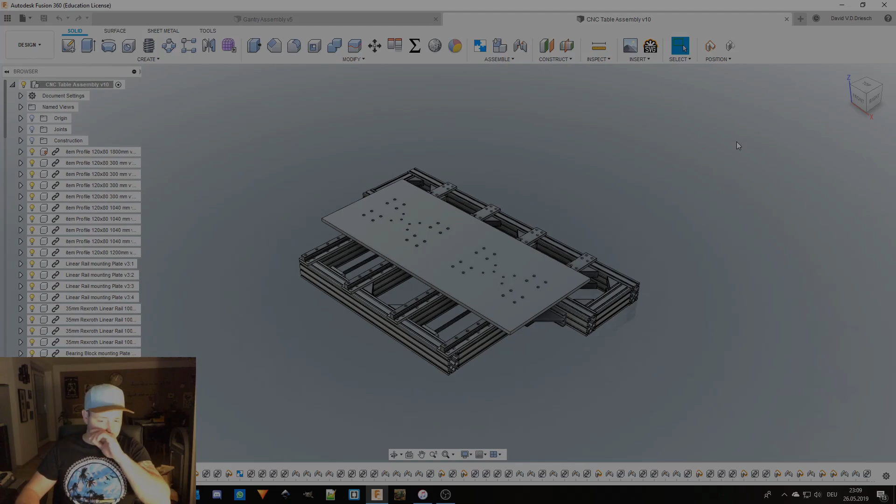Welcome to part 3 of my video series on how to design a CNC router, at least the way I would do it.

In the last part I designed the table structure and made it all up. Now I'm going to design the gantry, or actually I already did design it. In this video I'll show you how I switch back and forth between the different assemblies to achieve how I draw those aluminum plates by just taking measurements, so I don't have to draw it in the assembly. I hope you can follow me with that.

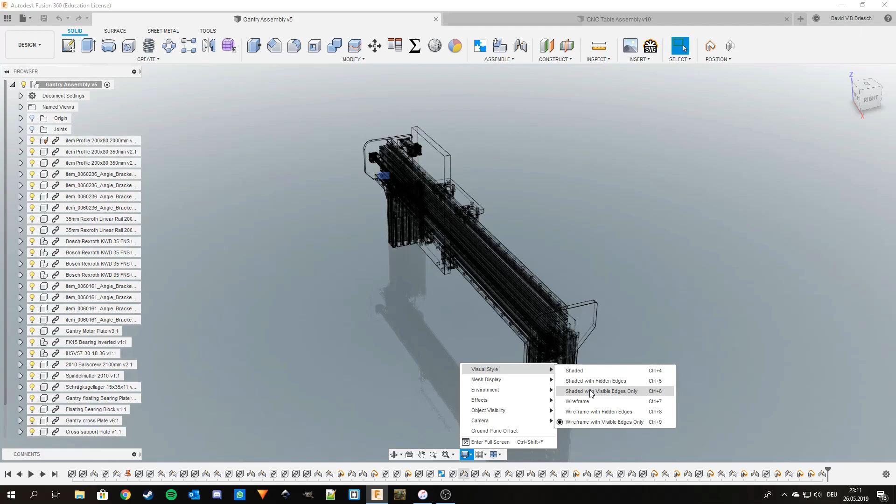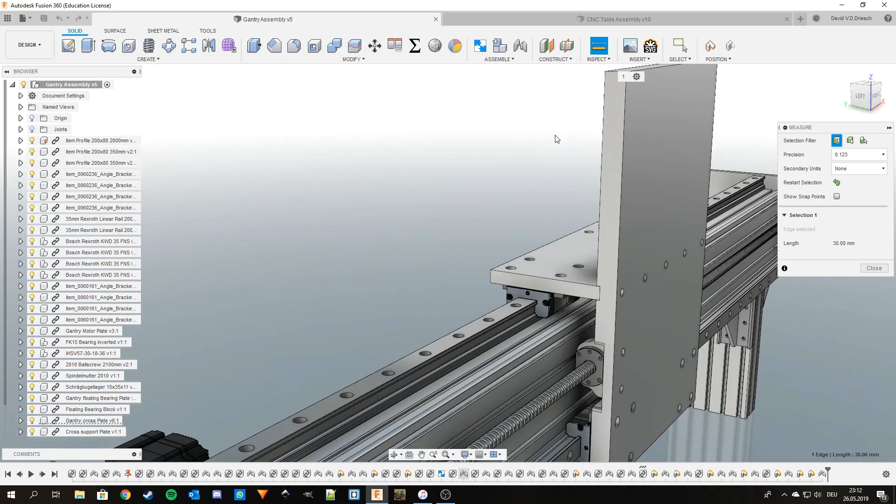I actually already came up with this design. It's again ball screw drive, this is what's going on here. This one is a 30mm aluminum plate, yeah, 30mm, and also those are the 35mm linear guides.

So what I'm now going to design is the side plate that will go on those sides. Let me hide this one for now. Basically it will extend down to here, go up to here, make a corner, go up to this profile, and back down here. This is going to screw or bolt onto those profiles.

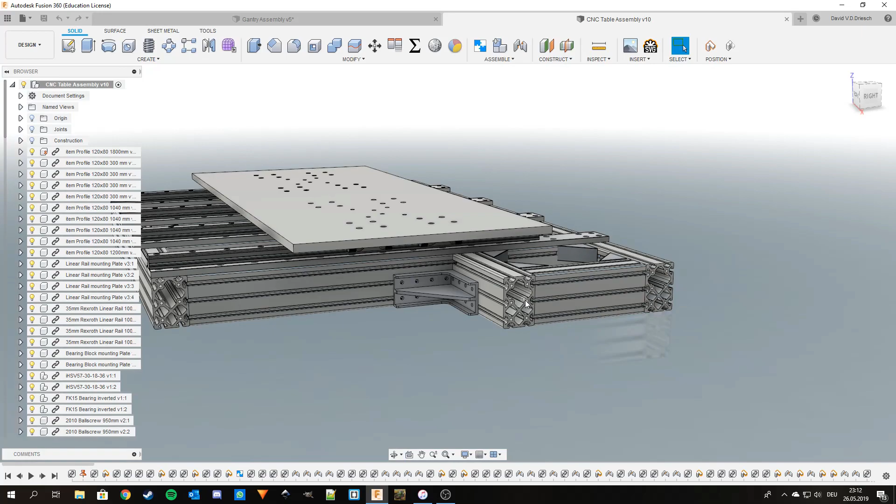This video is going to be a bit longer than my last one, so I hope it won't get too boring for you. But yeah, let's start designing.

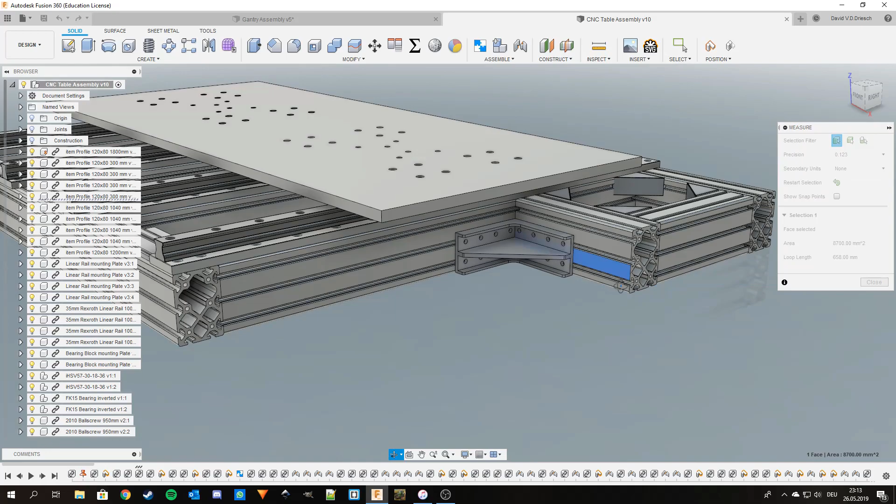First I'm going to take measurement from there to there: 460mm.

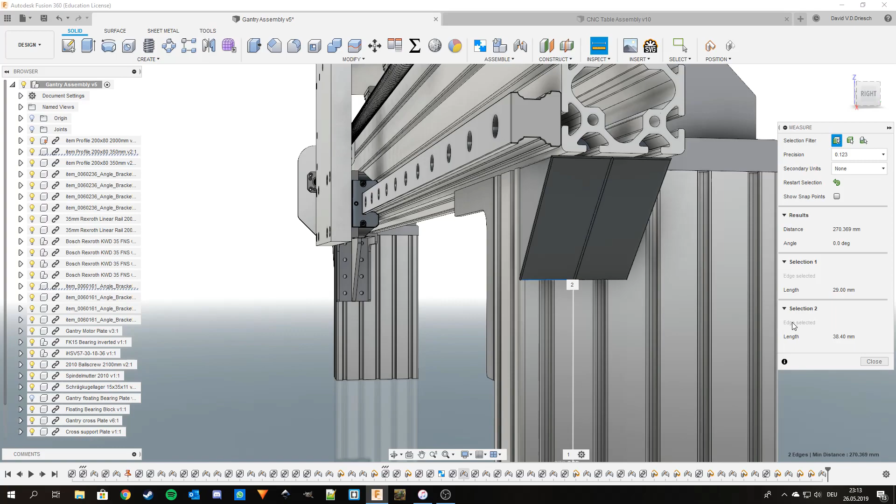This is this edge to... I'm going to make it 280mm, so I have a bit of room. Profiles are 80mm wide, this one's 200mm in height.

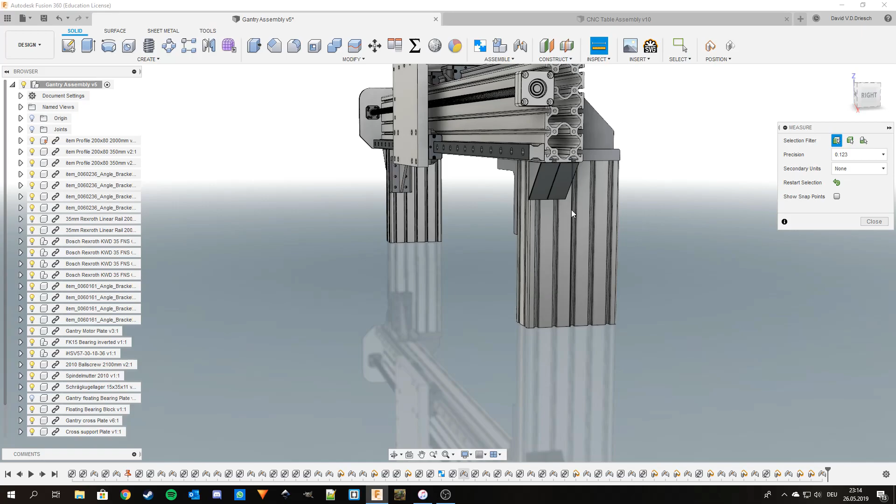Wait, overall height from there. It's a bit complicated, but as I mentioned in the last videos, I want to keep the assemblies pretty clean. 550 plus 120 is 670mm overall height.

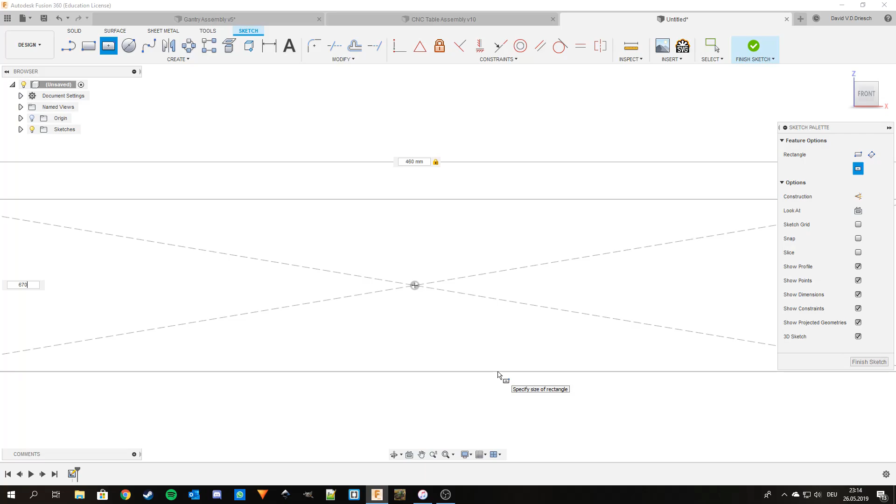Okay, starting out with a new sketch. 460, and what did I say? 670. Extrude 20 millimeter.

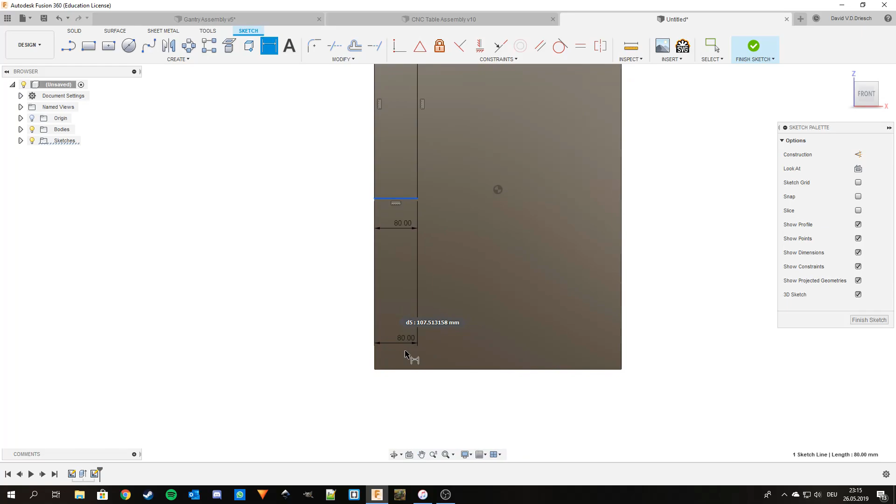I always want to make those parts look as aesthetic as possible, because I don't want it to look blocky. It should have some nice edges on it and look quite nice. Just going for a nice design.

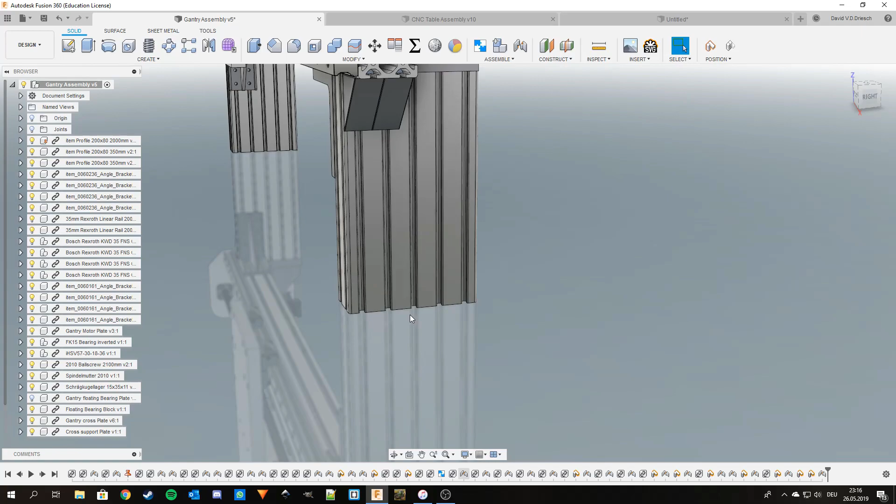Now I'm going to make those holes. 20. No.

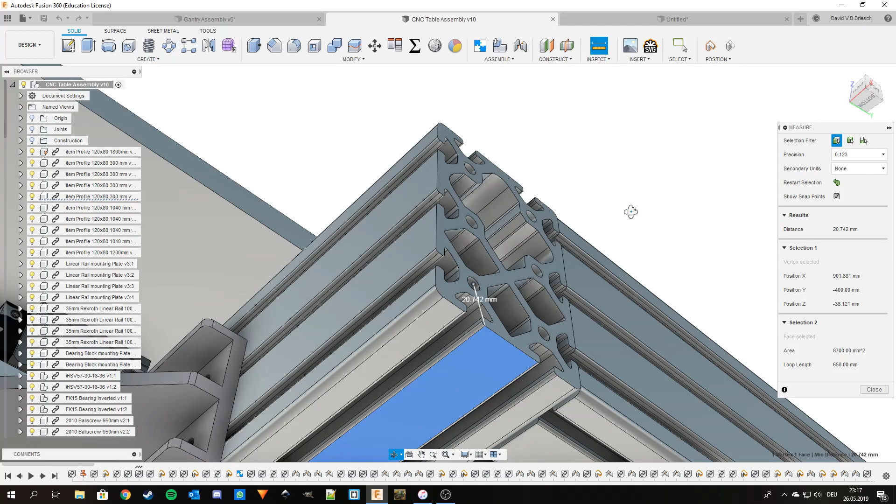So now you can see how my workflow is. It's actually pretty inconvenient, but this is how I do it, and this is how I feel comfortable designing things. Sure enough, there are different ways to design things like this, but this is my way.

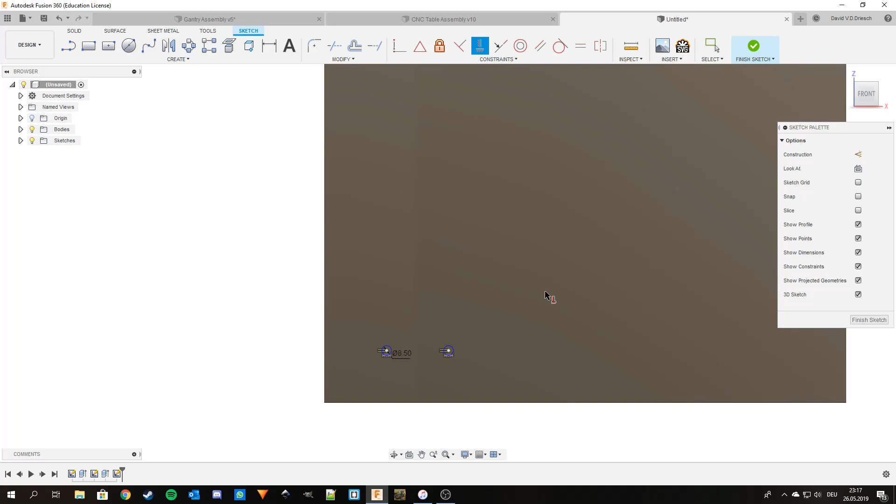This is going to be horizontal to this one. Dimension 20 millimeter, 40 millimeter, 20 to there.

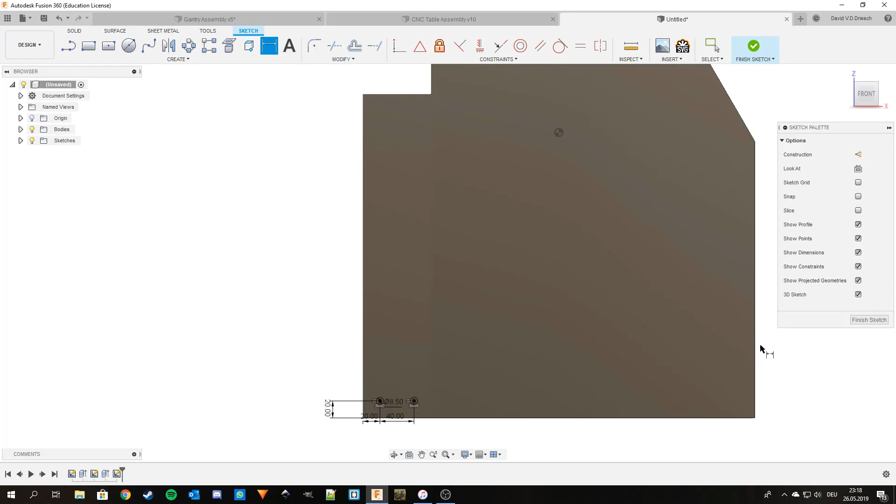Okay, finish, extrude. That's 20. Another sketch on there. Making countersink holes.

Just eyeballing it. Later on I always can tweak this. For now, just for the basic idea.

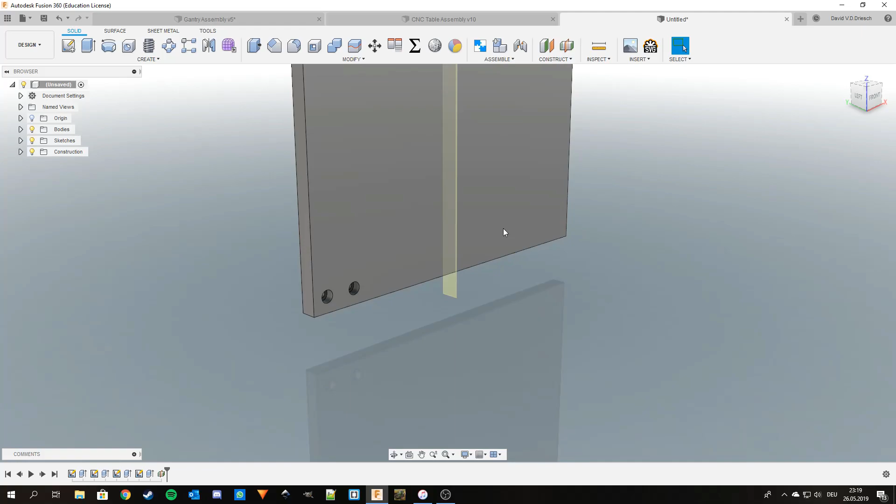Now I'm going to make a midplane between this and this face, because I'm going to mirror those features to there. But first, I'm going to make a rectangular pattern of those features.

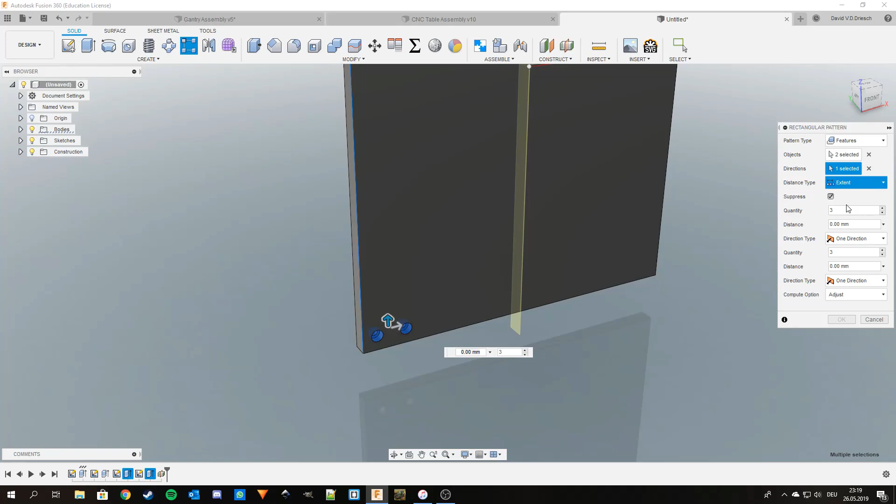Just simply select this extrude and this extrude in the timeline. The direction will be this one, and I'm going for spacing. Spacing is 40 millimeters, on those profiles.

Three holes, and now I'm going to mirror features: this feature, the rectangular pattern, and this extrude and this extrude, with the mirror plane being this construction plane.

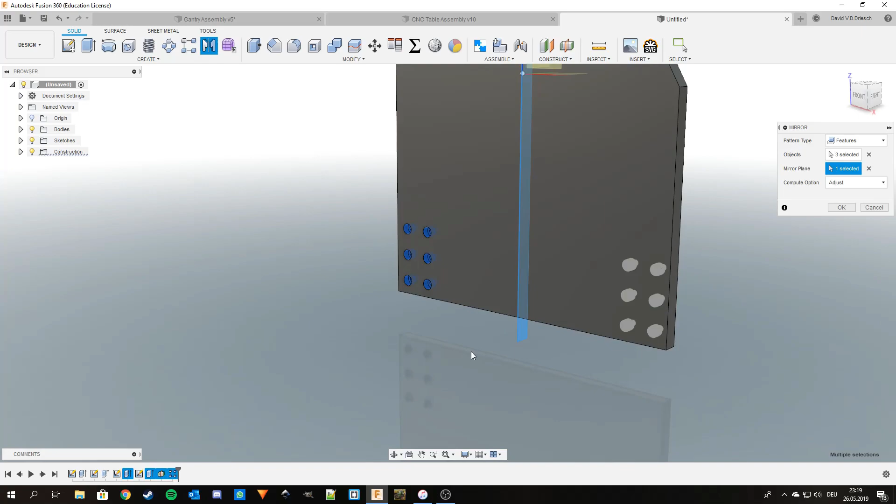And those holes are those ones here. This is where the bolts will go into.

Now I'm going to make, for those 3 slots, I think only 2 holes. So I could actually do it with a rectangular pattern, selecting faces.

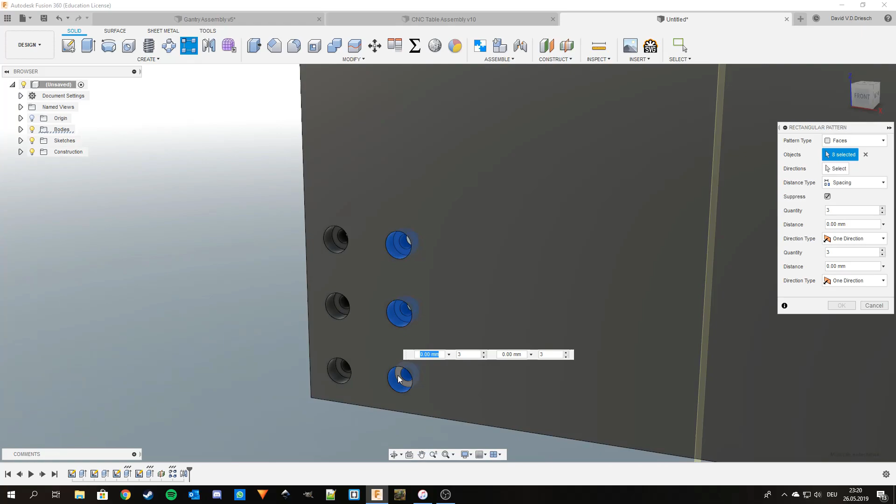This, this, this, this, this, this. I don't know if this works out. Never made a rectangular pattern with those faces, but I only want 2.

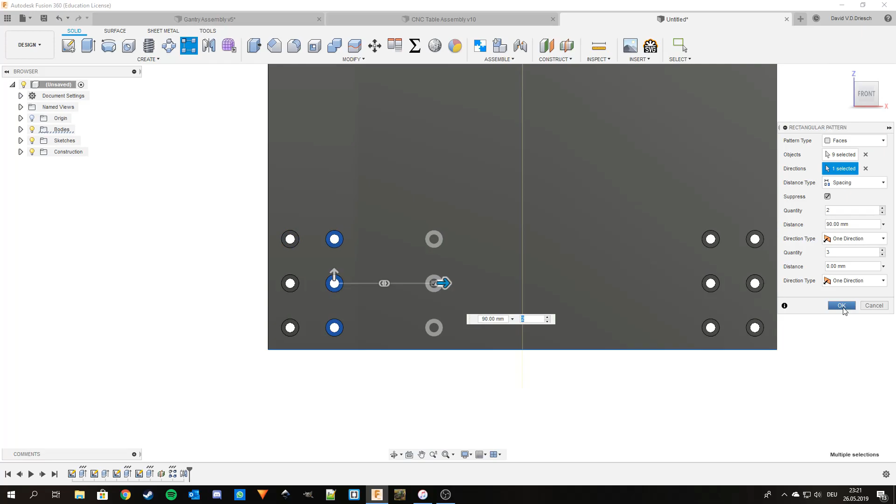And make them about 90mm apart. Okay, oh yeah, it worked. Great.

Let's do another one: this, this, this, this, this, this, this, this, and this. Direction will be this one, and 2, then 90mm. Okay, cool, great.

Now I'm going to make the holes for the uprights on this profile.

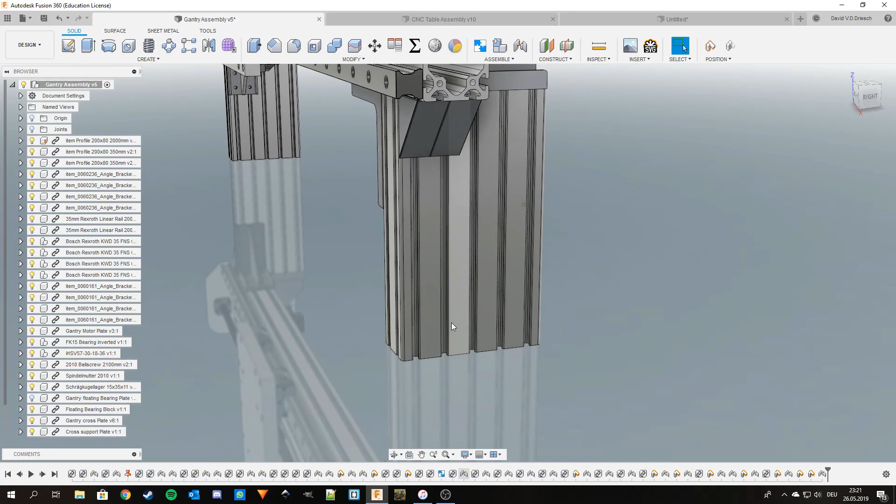First slot is 20mm away from this face, and then each slot is again 20mm, if I remember right. But let me check, this point to this point. No, 40mm, sorry.

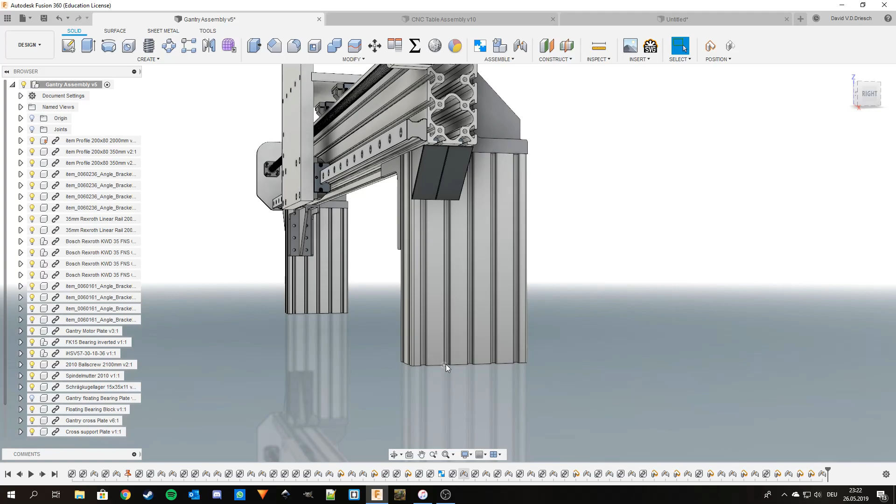I'm going to make the first slot, the middle slot, and the last slot. This should be plenty to hold on to.

Sketch, circle, just place them randomly. Dimension 8.5mm through hole. This one is equal to this one is equal to this one, and they all should be horizontal to each other.

I'm going to dimension distances: 20mm from the face, then 80mm to the middle slot, and again 80mm to the last slot. That's right? Yeah, it is.

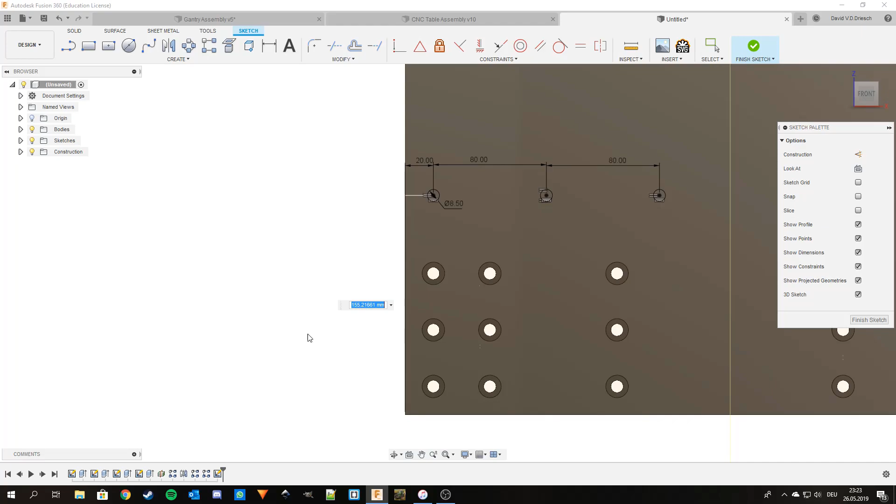For this dimension I'm just going to eyeball it, let's say 150mm. Extrude. Select the profiles, minus 20mm.

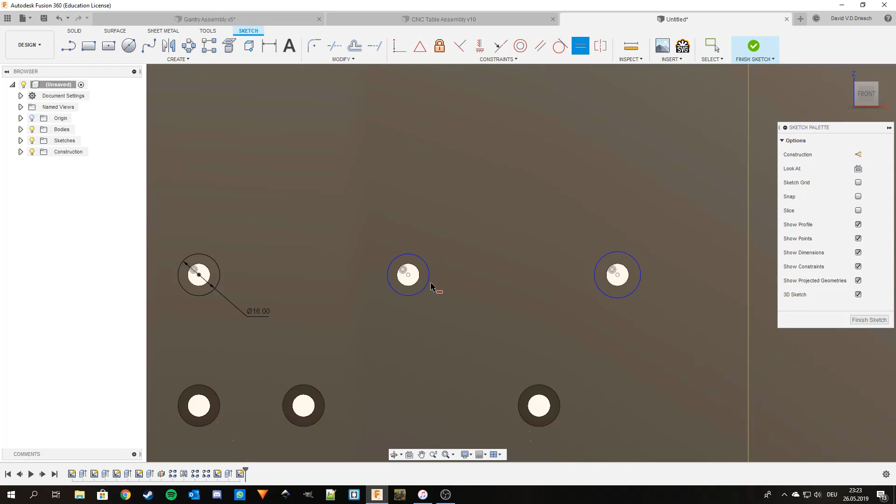Press C for circle. Click the plane or face you want to sketch onto. Draw those 3 circles. Dimension it 16mm. Again, equal constraint. There you have it.

Extrude 3 profiles, minus 10mm countersink. There you go. And again, rectangular pattern.

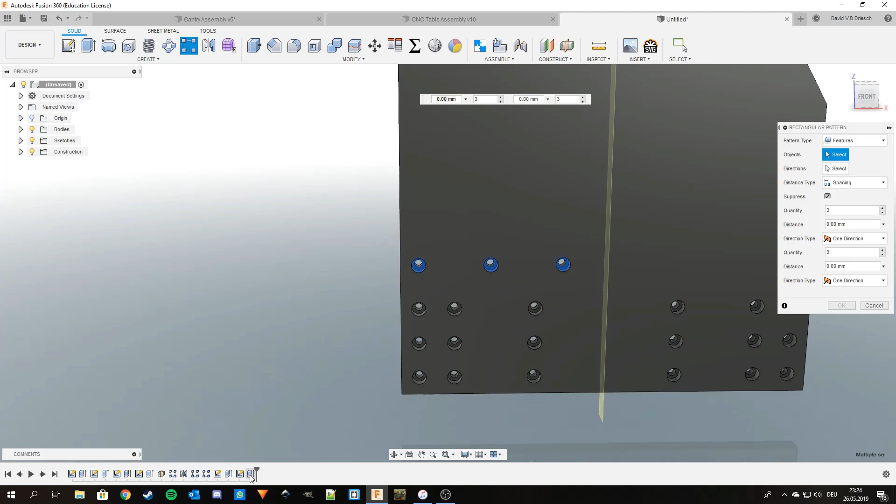This time I'm going for the feature. Just select this feature and this feature. The direction is going to be upwards, and I'm going for 3, that should be enough I think.

Oh, I can't. No, that's right.

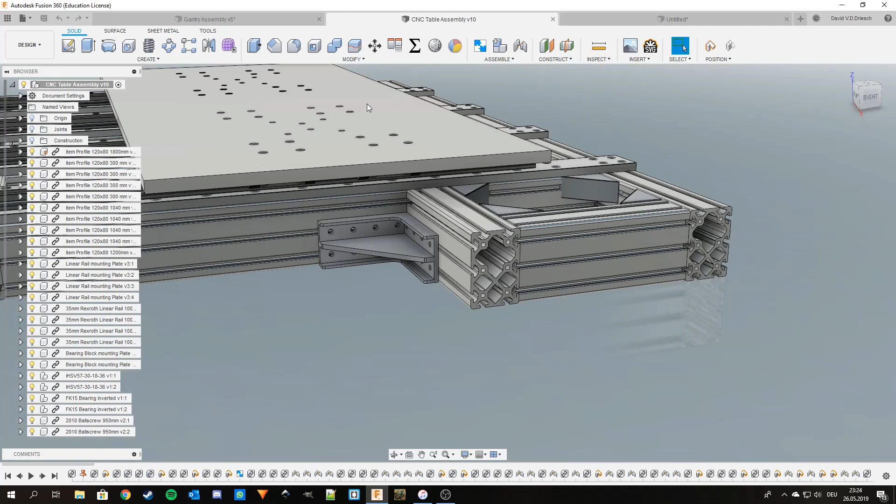Yeah, a lot of holes, a lot of bolts that will go into there, but it has to. Just turn off this construction plane. This basically should be it. Now let me see if I missed something. Actually, I don't think so. All looks good.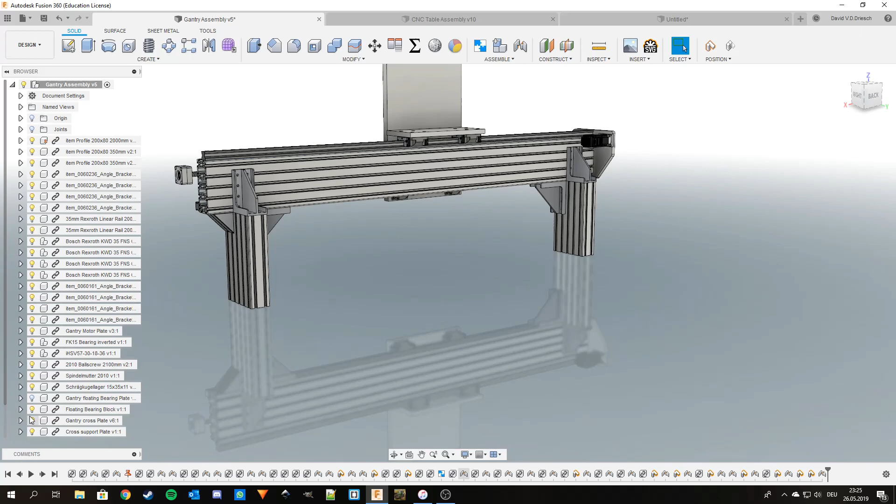Oh yeah. But no, I actually don't need this. Just don't mind, I'm just thinking loud. Put this one on.

How much space do I have right here? That's there. 24 millimeters.

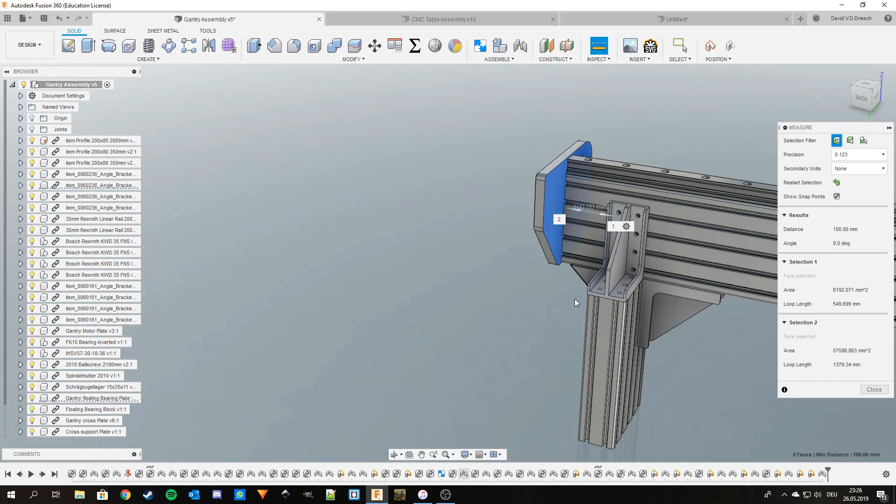Just thinking if I put a plate, because the gantry riser goes all the way up to here, and I'm thinking if I put a plate from there to there. This is 100 millimeters, plate would be 80 millimeters, but I don't think that it adds a lot of strength to it.

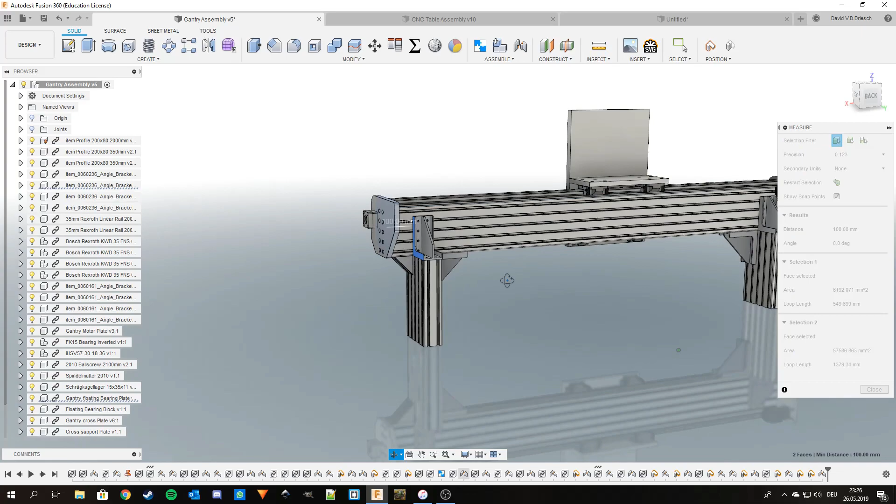Because I already have here my angles and this one angle. So I think I'm going to decide it on a later point.

So as you can see here, the other plate or gantry riser that I will make has to be a bit different, because my servo motor is actually penetrating the plate, which will go onto this side. But I will show you how I get around this one.

Now I'm basically wrapping this one up, making a fillet right there. It's I think 3 millimeter. I make it 3.5 because my cutter is going to be a 6 millimeter cutter, so I have a bit of clearance.

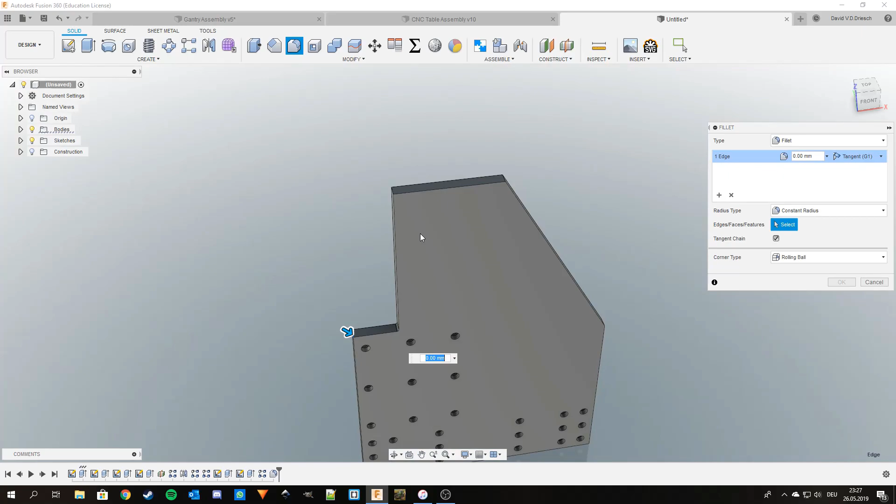Yeah, then just rounding parts off, so I don't have any sharp edges. There. Oh. Like this. 100 mil. And okay, then I'm going to chamfer edges. There.

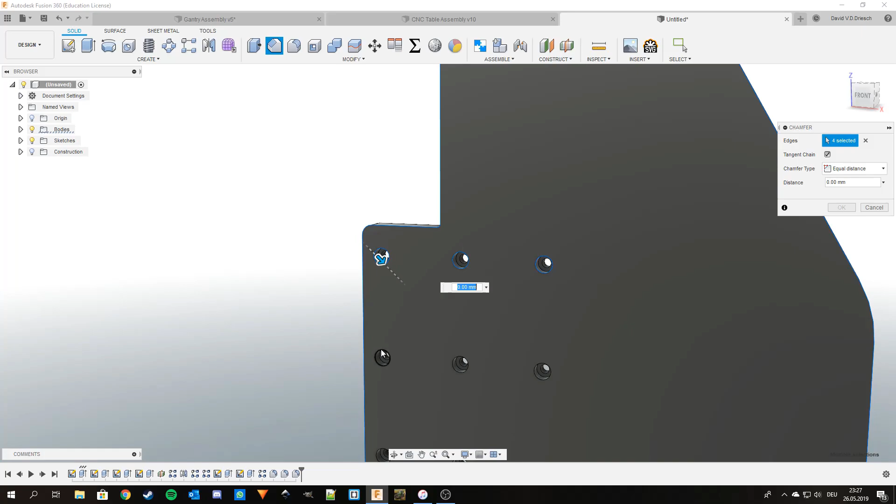A lot of clicking, but this is how it goes.

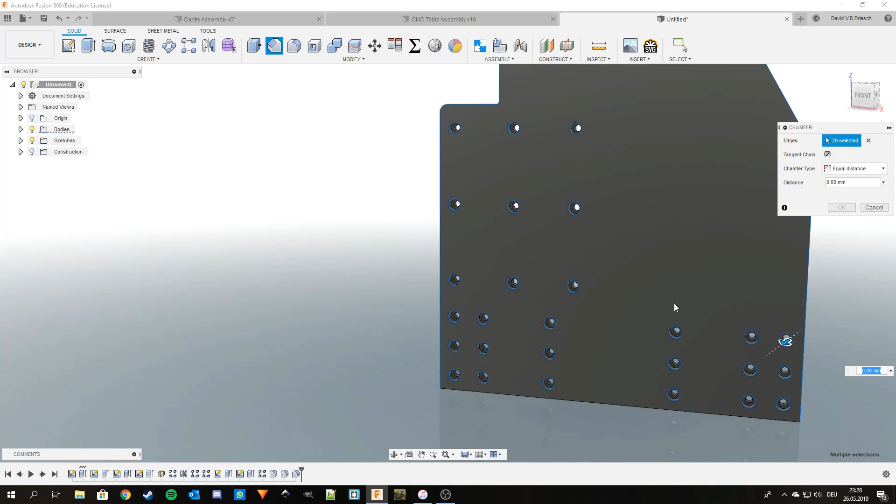I hope you guys really aren't bored with my videos, because sometimes it actually is pretty boring to watch somebody design things like this. But yeah, this is how it goes. And if I can teach you a couple of things, it's great for me, because I always want to help somebody out. If you have a question, just let me know, and I try my best to answer it or to help you out.

Next thing, just making it look good, aluminum satin.

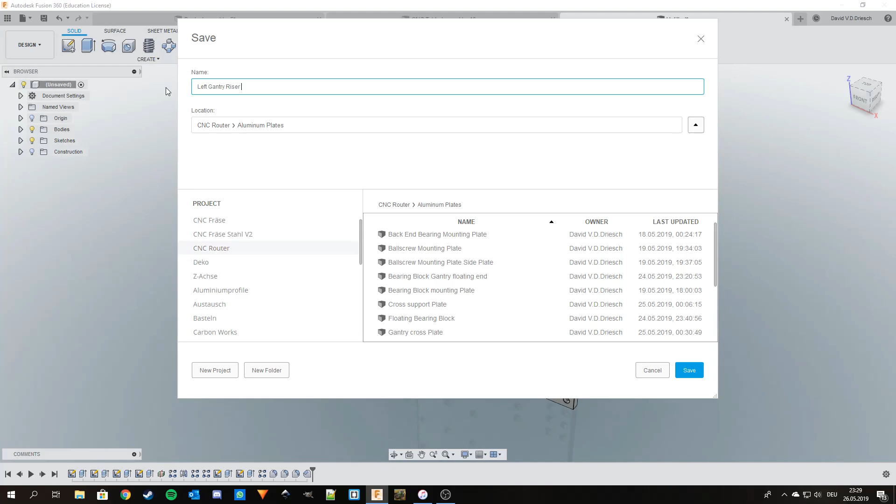Yeah, this is where I'm going to save it, because in the right location. Where is it? CNC Router there, aluminum plates, and this is the left gantry riser plate, and save.

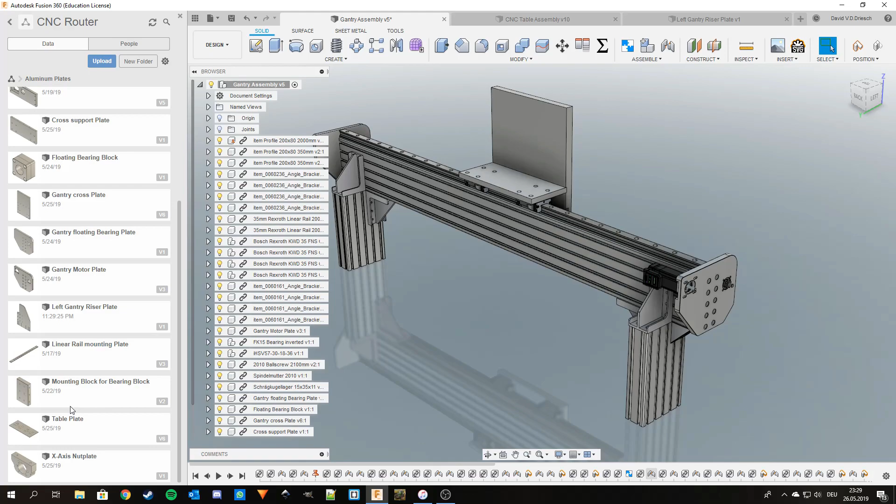So let's go have a look if it fits. Aluminum plates. So here you can see I actually modeled all those plates up and saved them in here, so I have them all on file. This one is it. Insert into current design.

Turn it around. Bringing it into rough position. Yeah, let me see, how am I going to apply it?

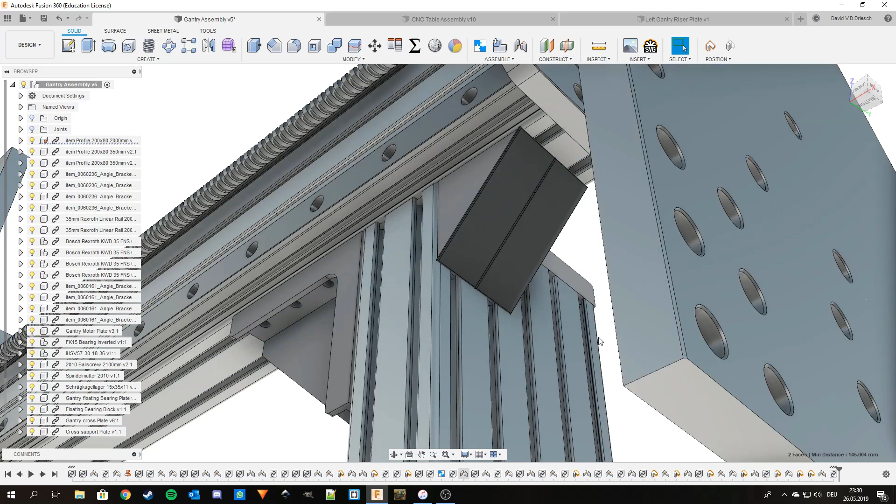Actually, I'm only going to align it there to there. Repeat, there to there. Repeat, there to there.

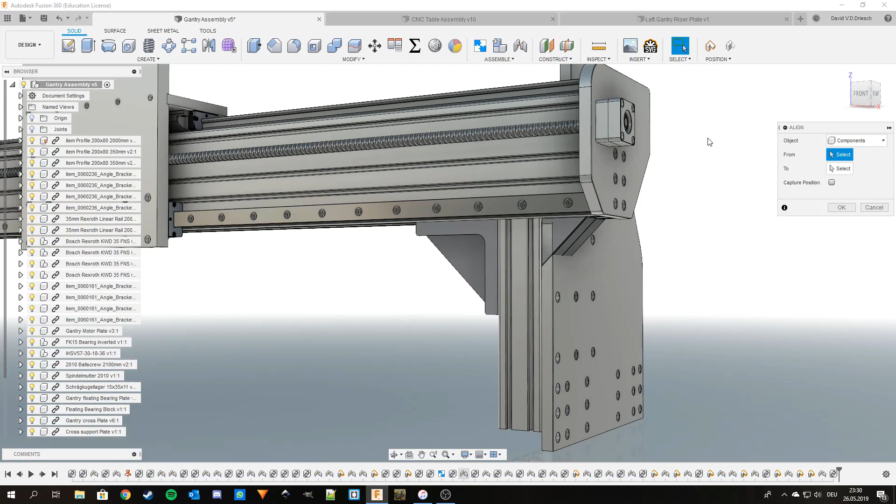Oh, and you can see I made a mistake. I made a huge mistake. No, I didn't. I haven't aligned it properly. There you go. All nice and snug.

So I think that I'm going to make an angle right here. So this means I have to make another hole into here. But I'm going to do this later on.

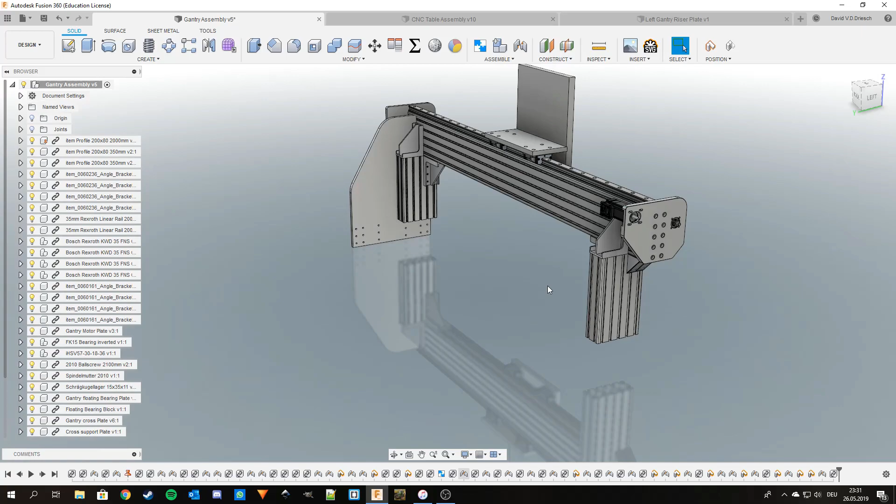For now, I'm going to make the other side of this gantry riser plate. Yeah, I'll show you how I do this. And it's actually as simple as mirroring this one over.

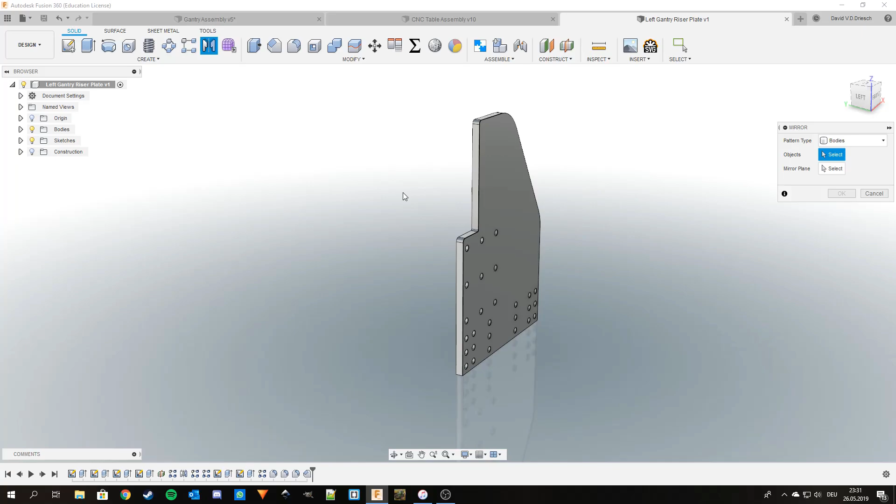So I'm going to create a mirror, not a feature. I'm mirroring the body, and the mirror plane is going to be this face, the back face of the plate actually. Then I'm going to remove this one.

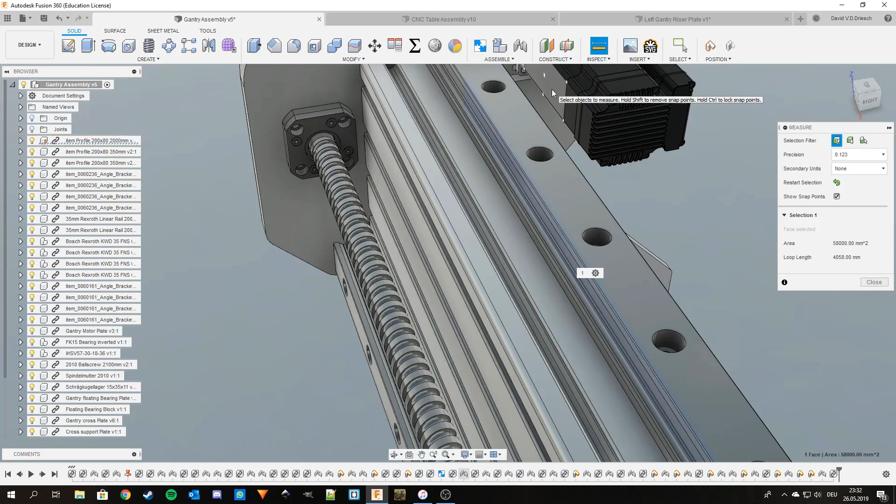And now I have to figure out where the cutout has to be for my servo motor. Gantry assembly, and again now I have to measure backside of the profile to this side of the motor, and as you can see here I have a bit of adjusting room.

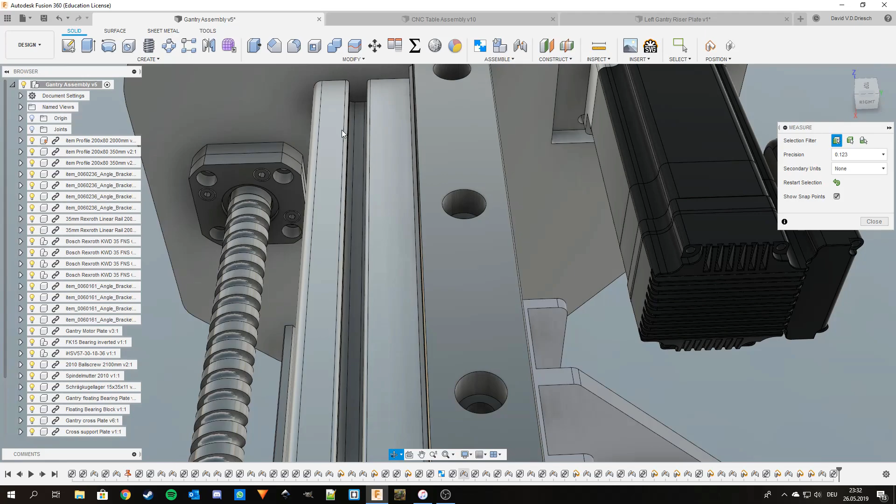Actually, I'm going to measure from there to there. Okay, that's 30 millimeters. And now I have to measure from the top of the profile to the bottom of my servo motor, and this is 38.5 millimeter. I'm going to make it 40 millimeter so I have a bit of clearance. So 30 millimeter from the back and 40 millimeter from the top.

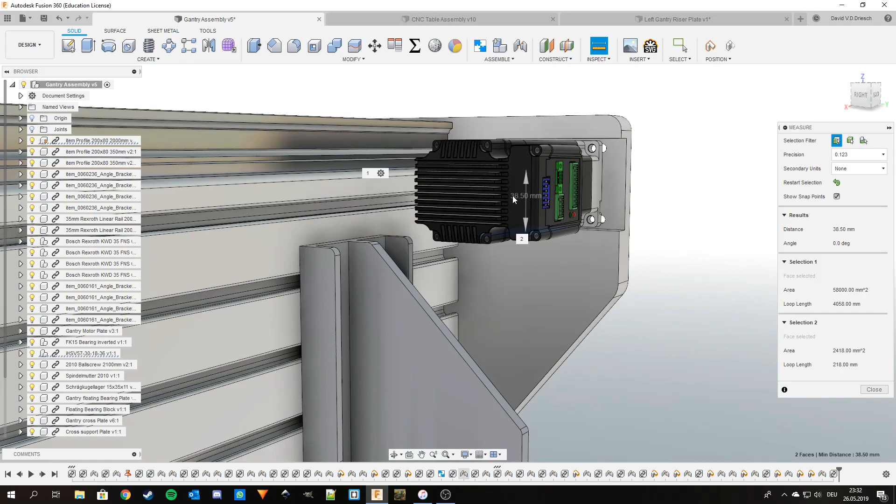This means for this one, sketch on here, I'm going to project the outline, so I have the correct measurements. Hit OK. Line, another line, just sketching it roughly in. Dimension, this one, oh wait,

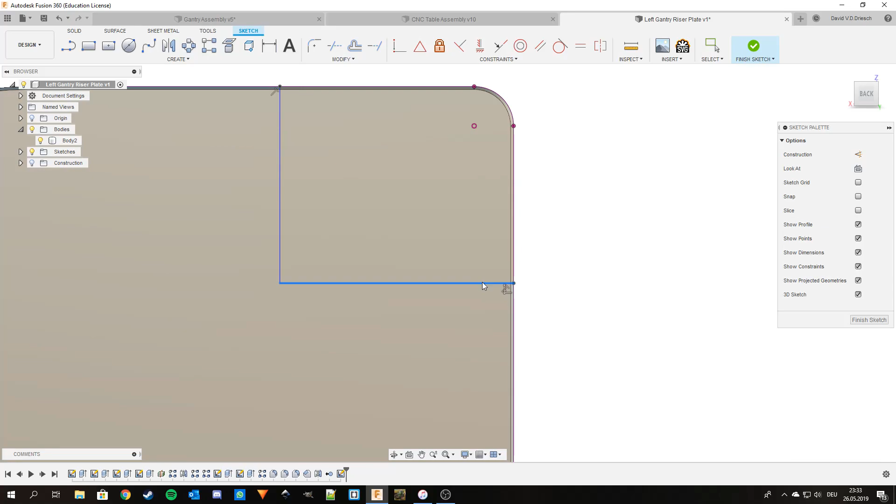it's completely wrong what I'm doing. Dimension, this one has to be 30 millimeter from there, right?

Yeah, and then I actually can cut out this whole section. Alright, this one has to be 40 millimeter. Now another line.

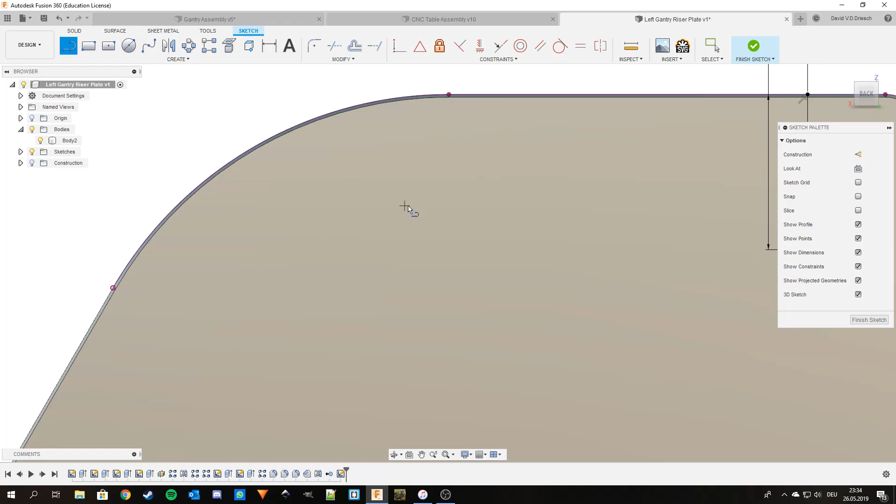First I have to project this line. Okay, line there to there. Making this one horizontal, turns black so it's fully defined. Hit extrude. Minus 20.

Oh, I see. Edit. Forgot the chamfer faces. There you go.

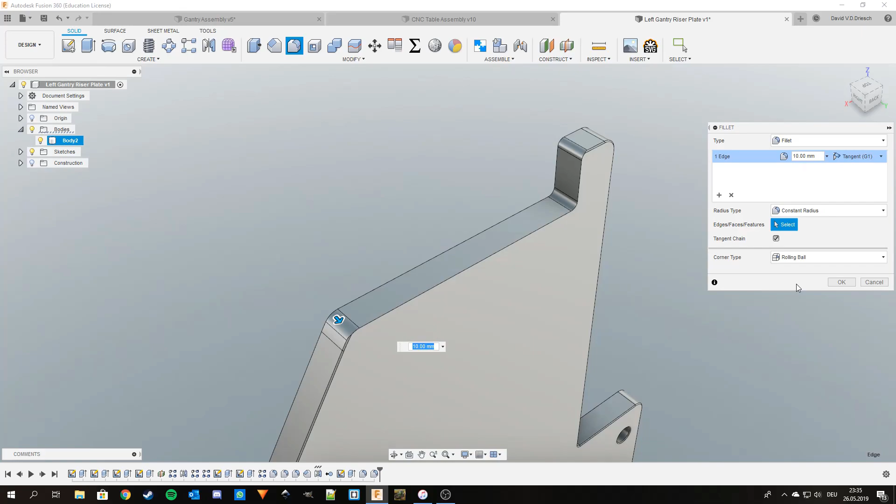Then I'm going to make a fillet right here. Yeah, 10 mil is fine. Actually, over there too. And right here. Also a small fillet. Now I'm going to chamfer.

Let's see if this works. I hope so. 0.75. Yeah, nice.

So now I'm going to save this one as right gantry riser. Actually, I named them the wrong way. Oh, but I can deal with that.

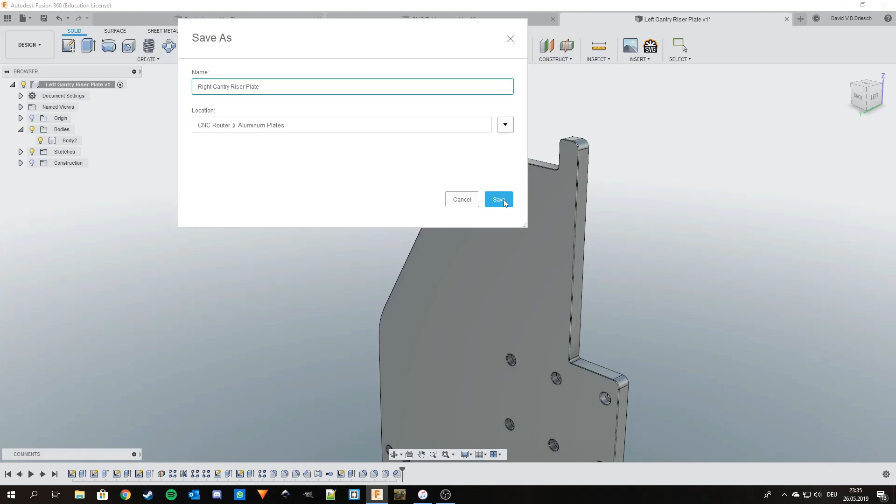Now let us look. Well, let's have a look if this fits all well. I hope so. Just has to save.

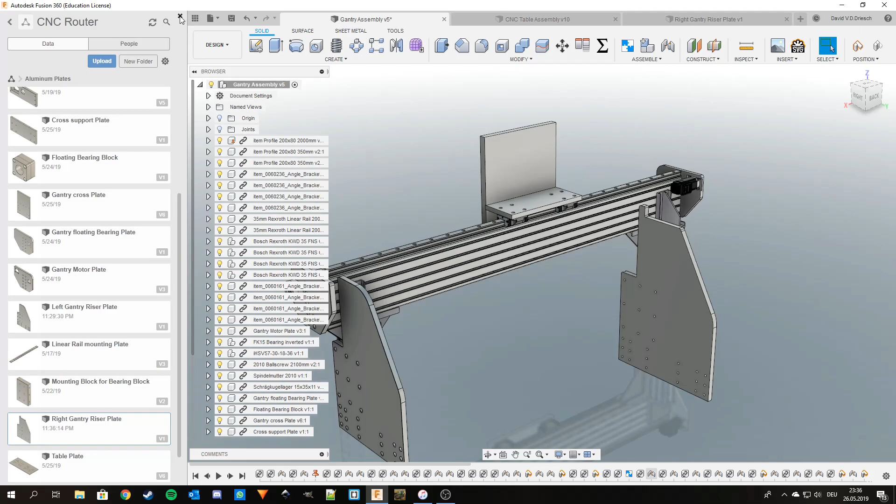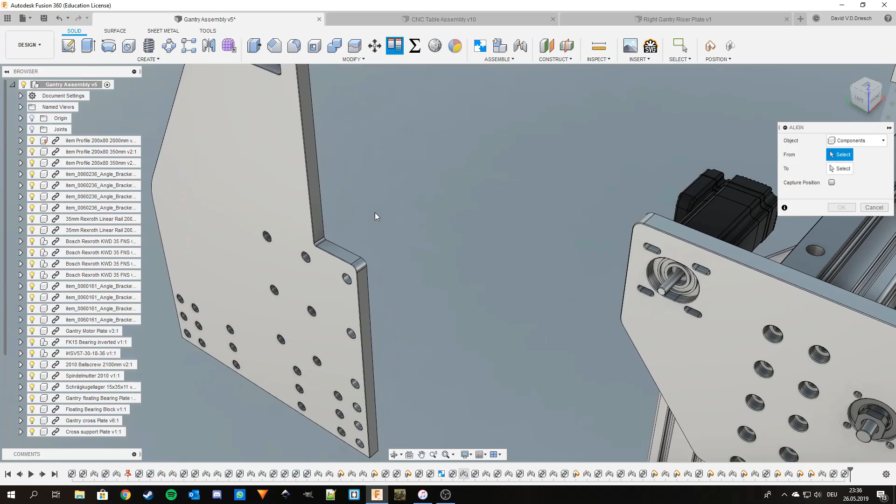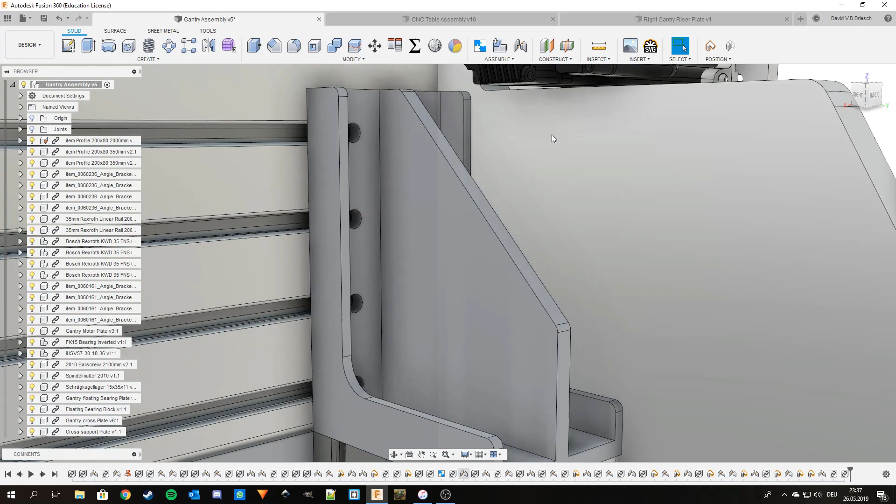Insert. Now aligning it there to there. Top face to the top face of the profile. There, there, to there. So as you can see, fits nicely. Bit of clearance, just enough, should work out.

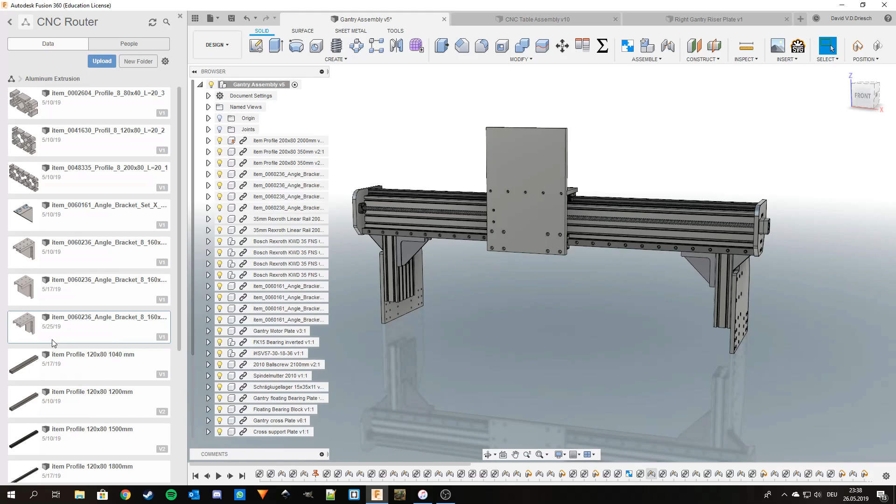So yeah, this is the actual process of how I make those plates in different files. Now the last thing I'm going to add right here is the angle on the bottom side of those profiles. They are located here. I actually made a modified version, or 2 modified versions, of those angles. Normally they come with those straight edges, and I have to use for the bottom one a modified one because otherwise I won't have the clearance for the table. But you will see this in a sec. Just let me assemble this.

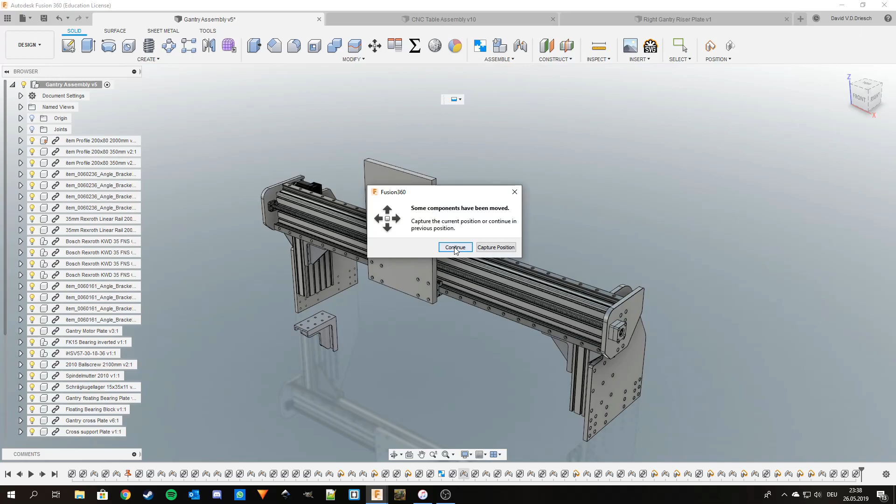If you don't have reference points like holes or something else for things to assemble to, you can just use points on parts. This is what I'm going to do right now. I'm using this point. Wait, do I have it the right way? No, I haven't. I have to choose this point, and then I'm going to choose this point. Now I'm going to turn it 90 degrees, and there you have it. It's assembled just fine.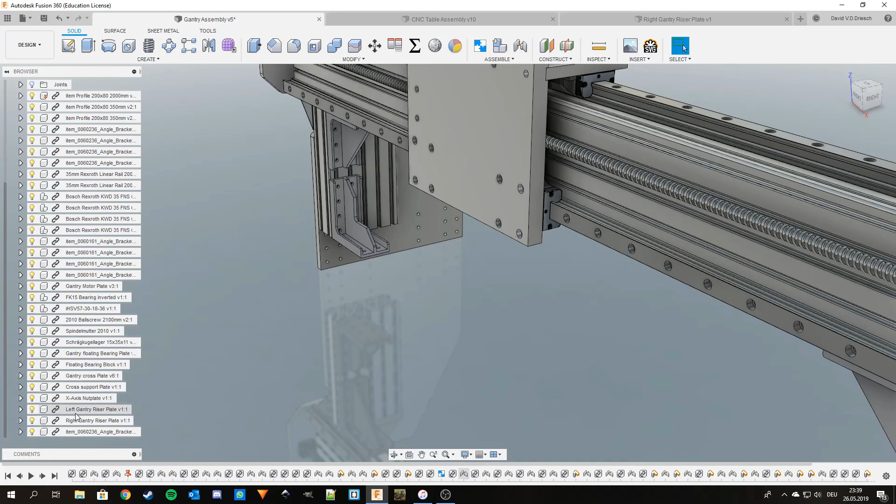Then I'm going to copy and paste this angle bracket, turn it around, and repeat the same thing. Choose this point, and then choosing this point. And if you want to lock the mouse pointer onto certain points, and don't want to have it fly all over the place - if there are many points, just hold down Control and it will jump to the next point, or to the point that's next to the mouse pointer.

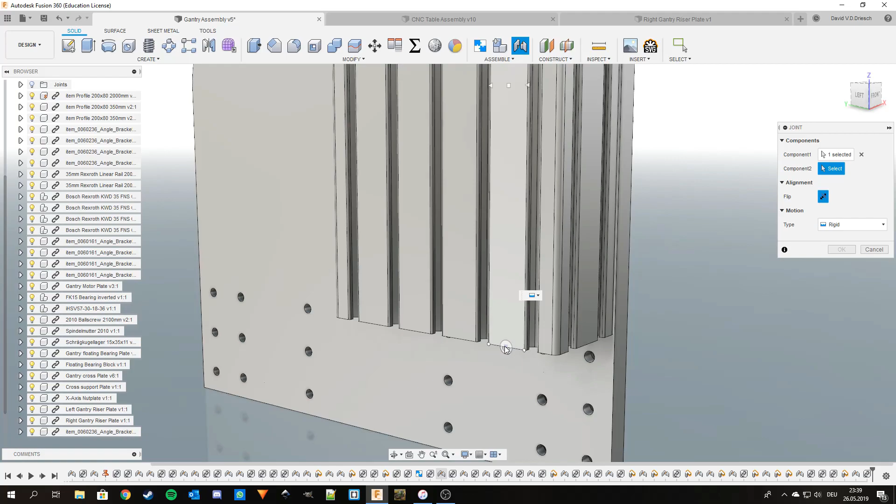So yeah, this is this. Now I'm going to make a rigid group for the side plates, there and there, or this and this, and okay. So yeah, this is going to be the gantry. Save this one out, and I actually went ahead and made the CNC router assembly already, just to get an overview of the router itself.

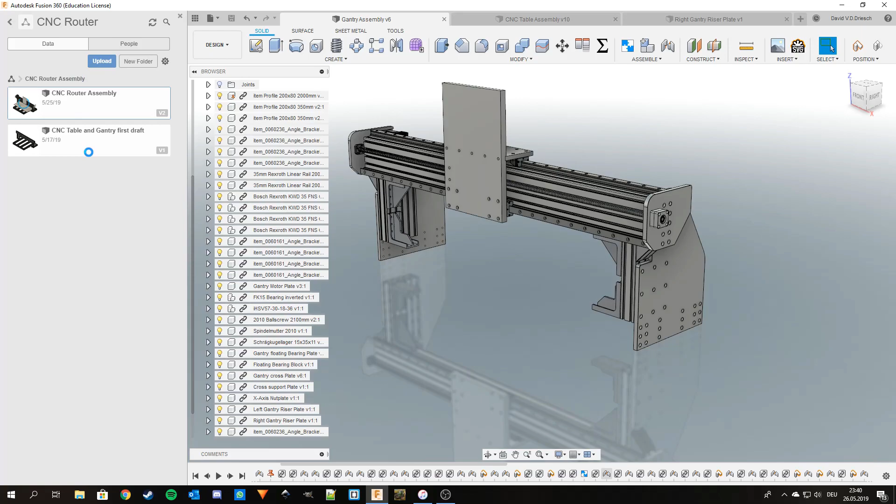Going to open it, and as you can see, the gantry assembly is outdated. Just hit this icon there, takes a bit, boom, there you have it. Wow, this actually looks pretty good.

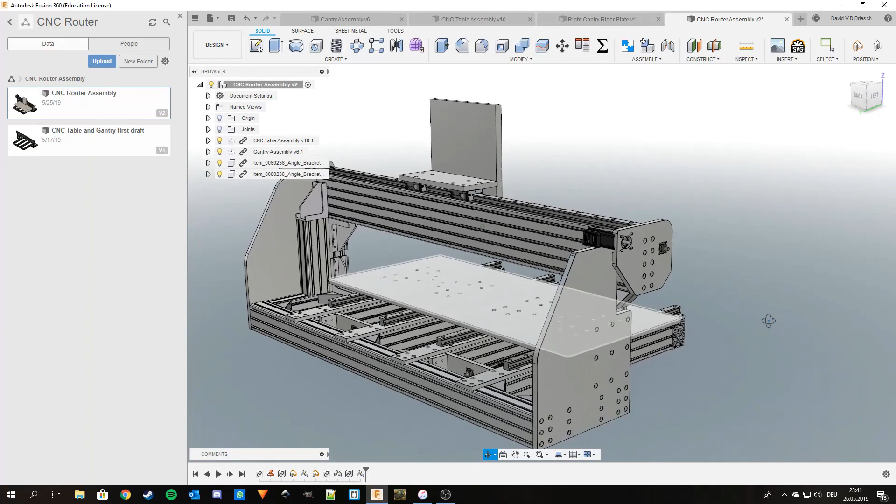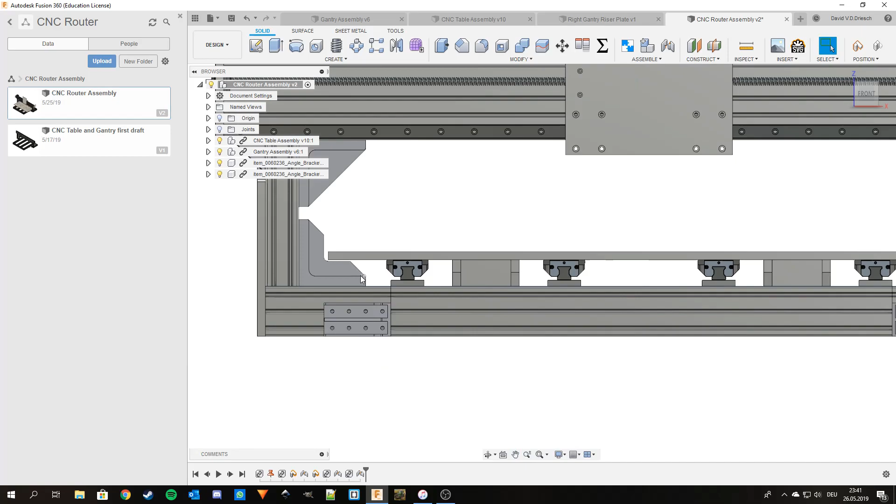I'm pretty impressed. So as you can see here, those bottom angles I had to modify for the table to go through there. Yeah, this is just a bit of clearance, but clearance is clearance, right? So yeah, this is how it's going to be, I think.

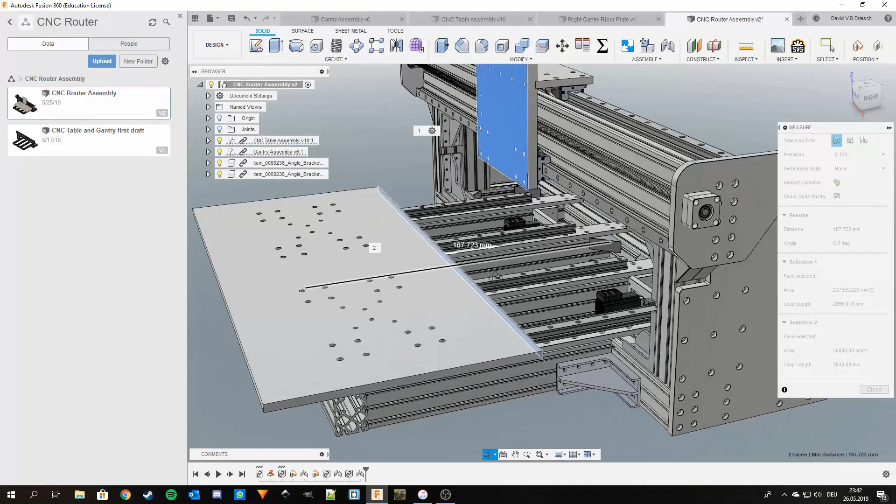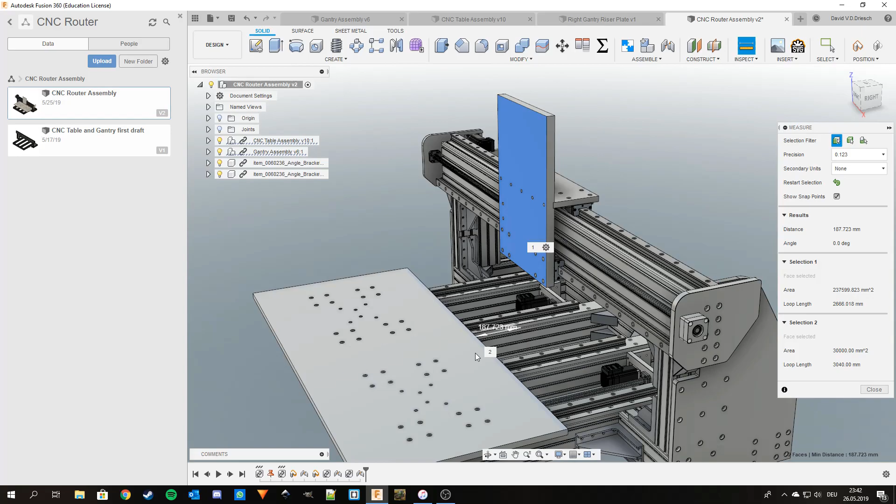Maybe I have to extend the table to the front and make those rails really all the way to the back end, because if I slide them over here and measure from this plate to this edge, or to this face of the table, it's only about 188 millimeters, and this probably isn't going to be enough, because my Z-axis will get pretty beefy and will actually take up at least 200 millimeters space to the center of the cutter. So I have to adjust this a bit, same in the other direction, but this should be no big deal.

And I'm going to change those plates also, because this also is going to be belt driven, and I wanted to have a gear reduction from 3 to 1. So the space actually from there to there isn't big enough, so I'm going to shift the ball screw over to the left. Same thing here. Maybe I'm going to switch this one, so the ball screw switches to the right side and the motor goes to the left side, so everything is symmetrical, or as symmetrical as possible.

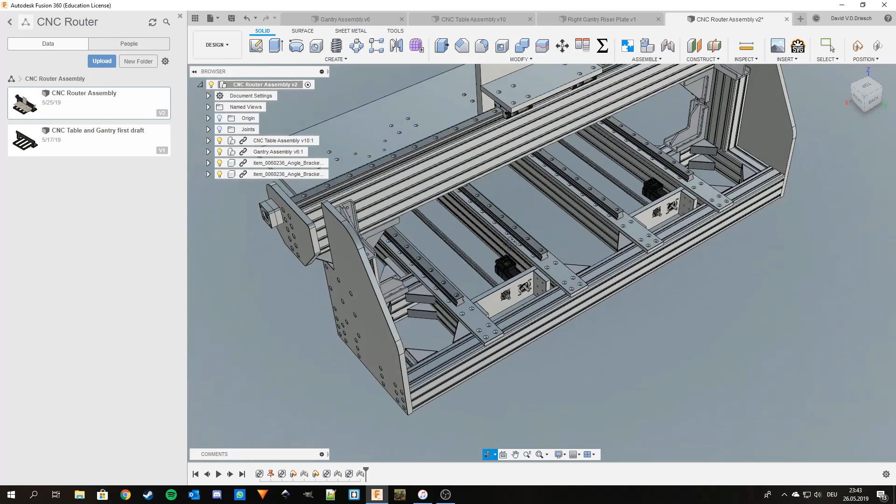So yeah, this is current design stage.

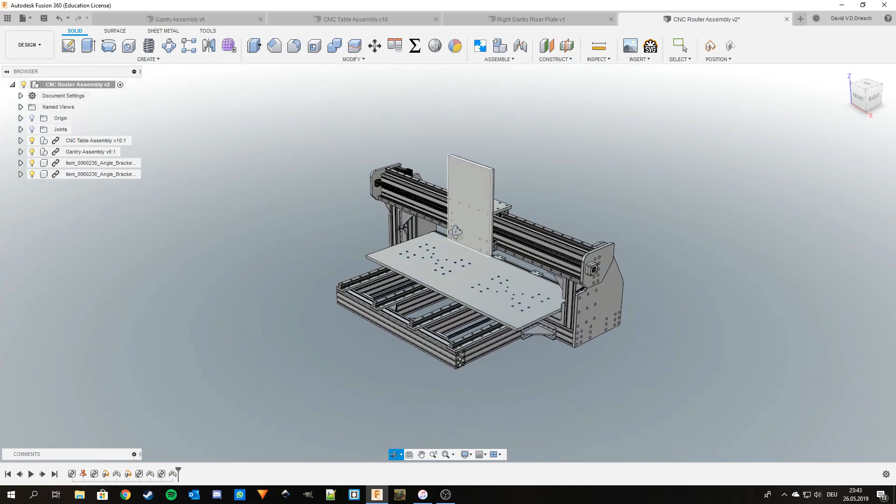If you followed me along this far, or to the end of the video, I really appreciate it. Next video will be about finishing up the X-axis carriage. There are going to be some side plates, and then I'm going to make the Z-axis. So yeah, and then this will be part 4, and part 5 is going to be about the last tweaks that I'm going to make to the design in order to make it all work out well. For example, the travel distances and some other things that I didn't think of yet. But for this stage, I'm pretty happy with how it turned out.

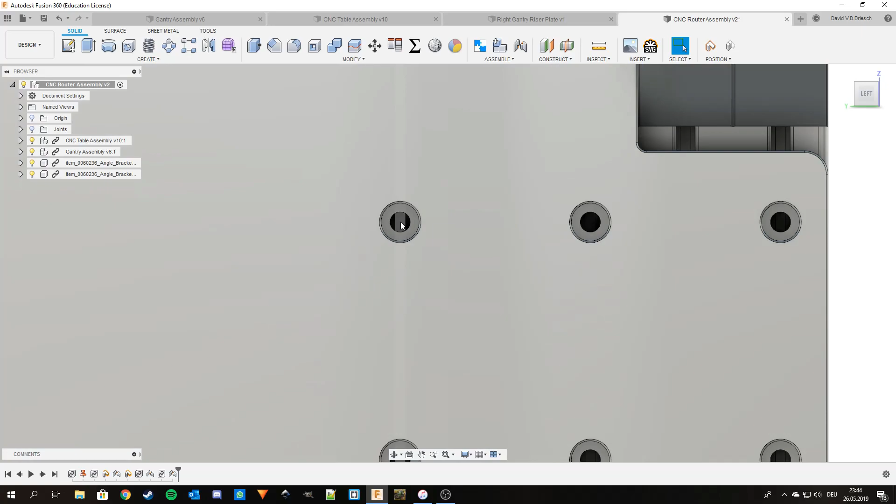And as you can see here, the holes all line up. This right here is the slot. There's the slot. There's the slot. So yeah, I think that this one is going to be a pretty sturdy machine.